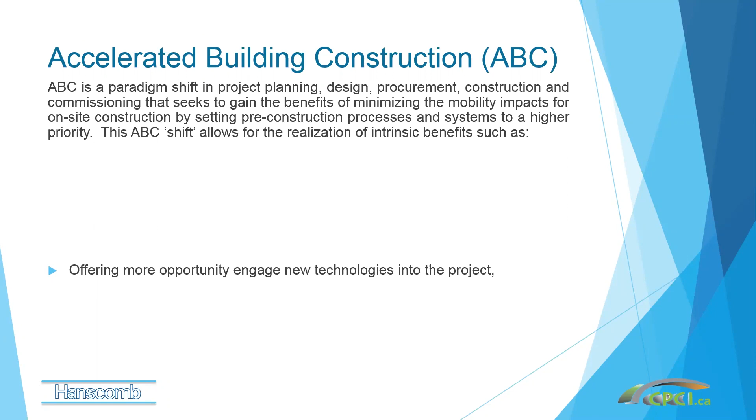Some of the intrinsic benefits include lowering our capital costs, basically shortens overall timelines. Some of these timelines can be shortened very dramatically. We of course improve our site safety and security. There's less disturbance on the site, it's a much cleaner site. We're going to gain a lot in project quality, and we've got many examples of that. We're going to enhance project durability. We're offering more opportunity to engage technologies into the project. The one benefit of these systems, of course, is that we have applications to install in a factory setting, and that makes it much easier to put in new technologies that are really wanted in the new building systems.

We're reducing long-term operational costs. We're limiting our social impact costs. And of course, we're limiting environmental impacts as well. I do notice I'm getting some questions early on, and we will answer them as best we can. I might leave them towards the end of the program today, but if there's something topical as we're coming up with it, I'll do my best to respond to it verbally.

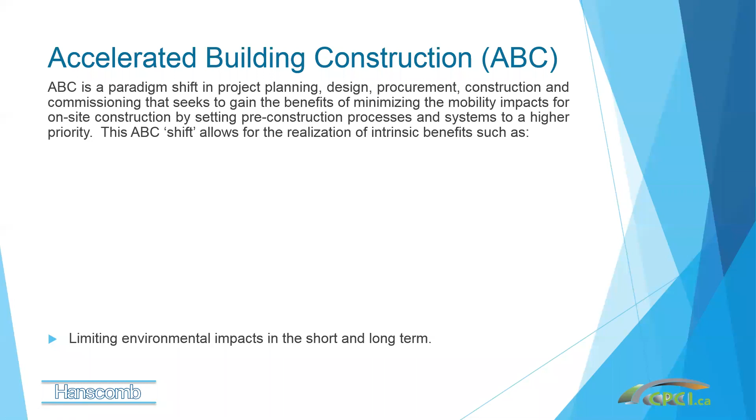Now, to carry on, areas where ABC improves projects is in the area of complete design integration. It's vital that design integration is used on an ABC project. What makes that really impactful is in the area where we see BIM being applied. Anybody who's a BIM proponent is going to really love ABC approaches to construction.

So site constructability is worked out very early on. In fact, much of the project is assembled, not so much constructed on site. That improves a number of factors, including access, the number of people you need on site, and the ease of installation. It's more of an understandable, intuitive process. It's much easier to build these projects, and again, we have lots of examples of that.

Site security is improved during the project, less to watch over, more just-in-time construction. Total project delivery time has dropped dramatically. Again, we've seen some incredible improvements on time, and I've got examples of that. Project zone safety for workers and the public alike is much better.

And project durability usually goes up. In fact, because we're working in modular systems, we are often building for that modular approach, and therefore everything we put in has to be that much more robust, and it shows up in the project.

Weather-related time delays are minimized, especially in today's changing climate conditions. That could be very important. And of course, overall financing and borrowing costs actually come down.

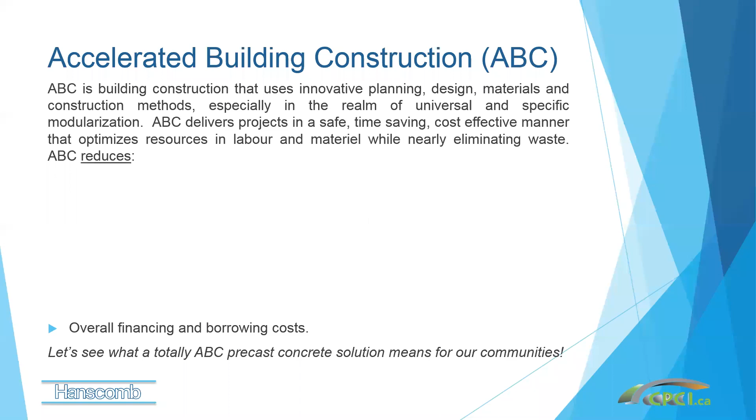Now let's look at a project from the point of view of a user. They didn't realize they had an ABC project. This video will tell you what they thought of the project.

Hi, I'm Licia Mullings, and I'd like to take you through our home. Bright colors provide stimulation in spaces specifically designed for dementia residents. Doors are paired together like duplexes with colored porches to provide a wayfinding experience.

Upstairs are 6 supported living neighborhoods, each with its own dining space and servery. There's ample room for relaxing and spending time with friends and family. Our residents love the abundance of natural light and the warmth of the interior finishes.

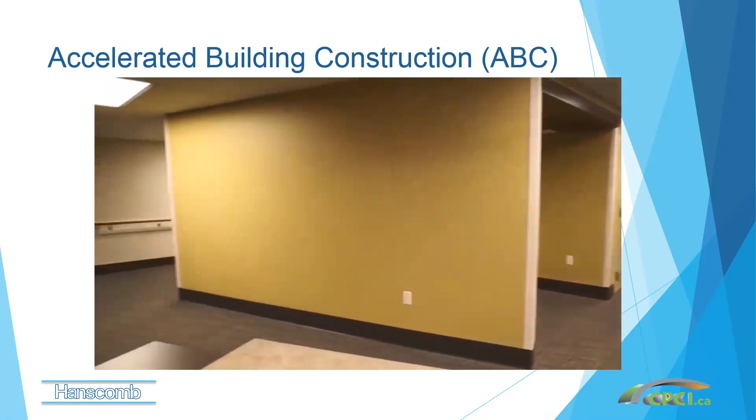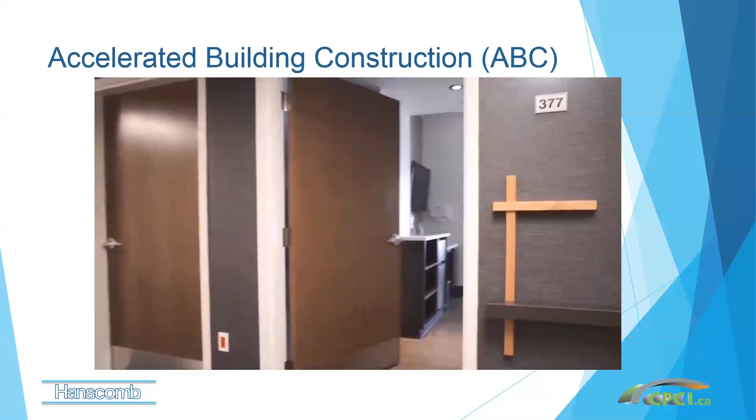Central care stations offer a clear view to all residents' front doors. Each neighborhood has 33 private suites, including some for couples.

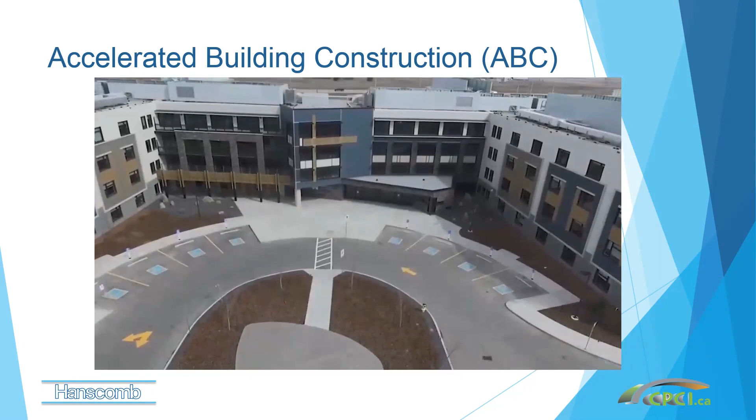Come inside. Each has its own kitchen, television, and barrier-free washroom. Secure gardens provide a safe outdoor experience.

Clients really loved the project. They have no idea that it was a modularized project with all the intrinsic benefits that come with it. They just noticed they got a wonderful project out of it. And certainly the quality is there.

So where did it all come from? Well, originally, this actually started with the U.S. Department of Transportation, their Federal Highway Administration. They're the ones that came up with the approach of modularizing a lot of their major systems, and they use it for things like overpasses and major highway sections.

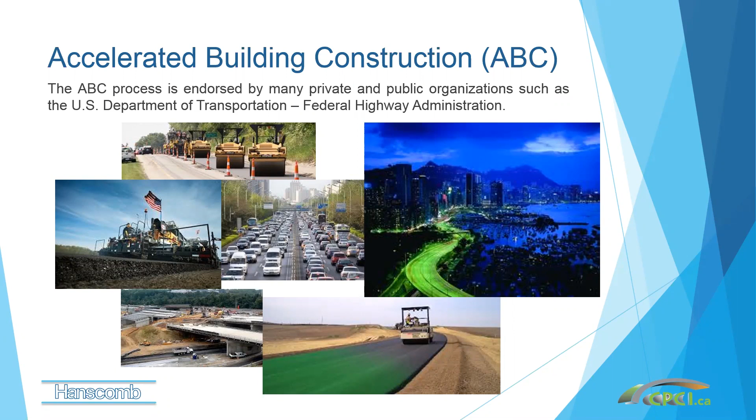The ABC process provides great flexibility across a wide variety of project types. We're mostly going to be talking about residential project types in this demonstration today, but you will see opportunities to look at all sorts of buildings using this system. And of course, it doesn't have to look like a box. Although if you want it to look like a box, it certainly can do that.

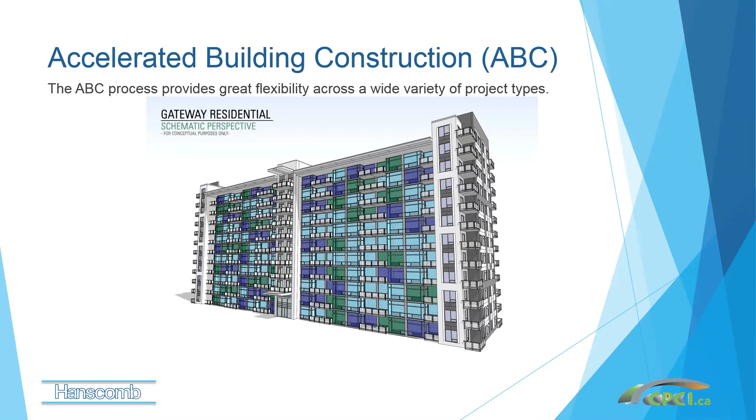This is a model of a project that was put together to be put in northern Alberta. And you can see this going in any major center anywhere in North America and Europe.

The ABC process allows unique solutions not offered by many site-built approaches. In this one, of course, we're looking at doing all sorts of modular units that get inserted into a structural frame.

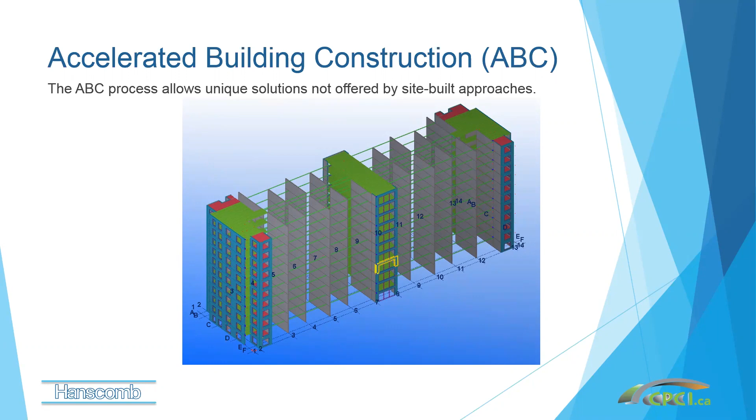So this gets to be logically rethought when you start looking at how you build things. Wouldn't it be nice if everything you did was undercover and the roof was already on? In this application, the approach was to put a roof on before the building was actually finished and then insert the units thereafter. You can see these units are blocked out as modules.

And that gives your client a lot of opportunities. An approach like this would allow you to have a presentation suite, do all your rework, pre-finish work ahead of time before you actually install it in the project.

And the level of quality control on a product like this would be superior because you wouldn't have to accept an inferior project on site. It would all come out with all defects gone and just be inserted into the project.

So the ABC process is only limited to the team's imagination. This is an example where their imagination worked, and when we ran the economics on this project, it looked very favorable. And you'll see examples of that where it's been done in the past.

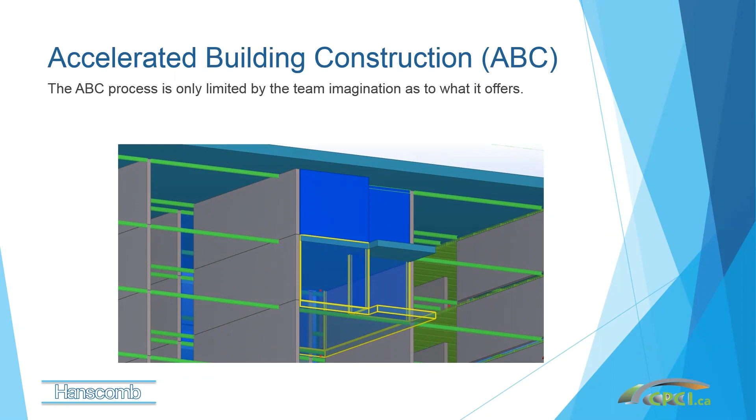The ABC process was critical in the overall development of major community development in Fort McMurray back in 2006, and I was involved in that project. We did 9 prototypical condominium apartment buildings using a panelized system with precast walls, floors, and roof assemblies. This was called the Eagle Ridge development, and its highlights included...

Primarily 6-story tall buildings, 150,000 square feet with 1 level of underground parking. The underground parking effectively ended up being free to the cost of the building because we basically just needed to cap off from the structure that was poured in place below that.

Each fully finished building was completed in just 55 calendar days by a crew of 6. That included a crane operator, the project manager, and 4 basically installers. And it took about 2/3 the cost of standard construction at that time.

In the photos that follow, you'll note how clean that site is. This is something we're quite proud of.

Because of the diversity, the same major residential development used the ABC process to replace a $20 million bridge design, overpass design, with a $6 million solution. So again, the modular approach really came to the fore, especially back in the whole highways and overpass systems.

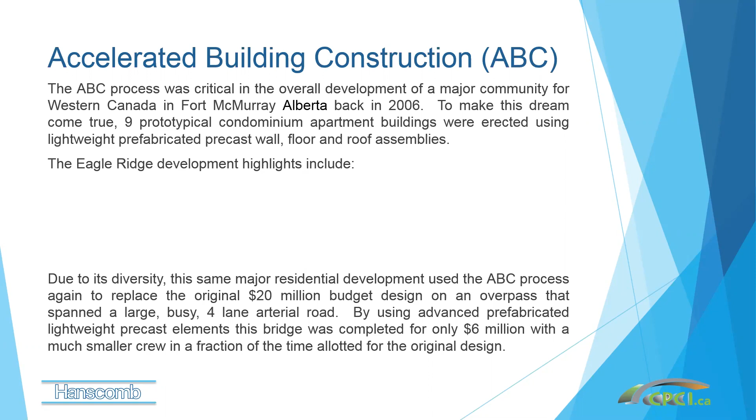Here's a picture of the project as it existed before the fires in Fort McMurray. A bit of an aside on that - they had some major fires in the area. These buildings basically went unscathed, even though there were lots of fires around them. I think they had some damage to the roofs where they had to be repaired, but that was the only place where the fire had actually damaged the buildings whatsoever. So they actually withstood fire very, very well.

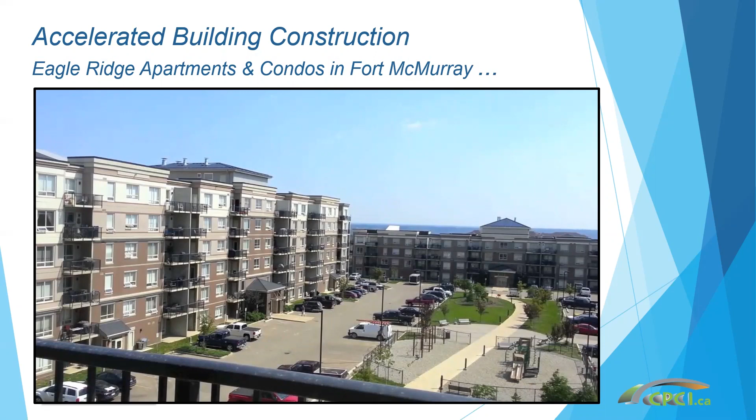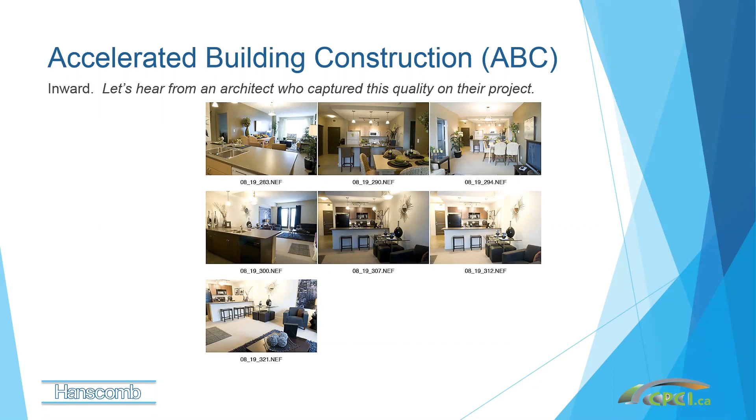I've got another video here to show you. This one is from the architect's point of view of that previous project you just saw.

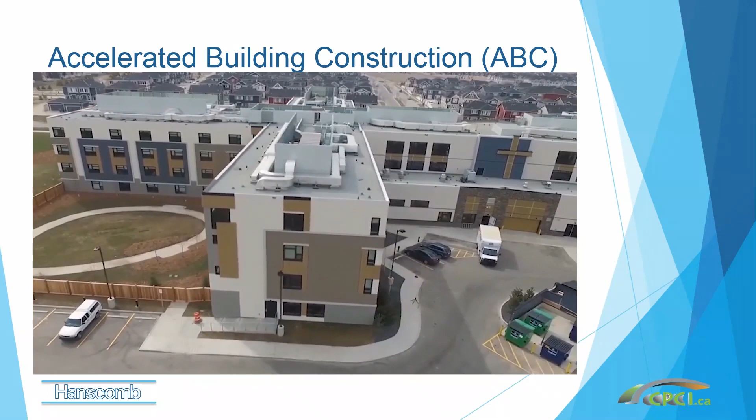I'm Christopher Babbitts from FWBA Architects. The decision to build with precast concrete informed the design, and our approach was to turn limitations into opportunities. Concrete surface treatments and creative use of color, texture, and depth enabled a 4-story design to harmonize with a 2-story neighborhood. A hollow core floor system, together with innovative delta beams, offered us the thinnest floor structure possible. A 4-story design was achievable within the zoned height restriction, which maximized the land value.

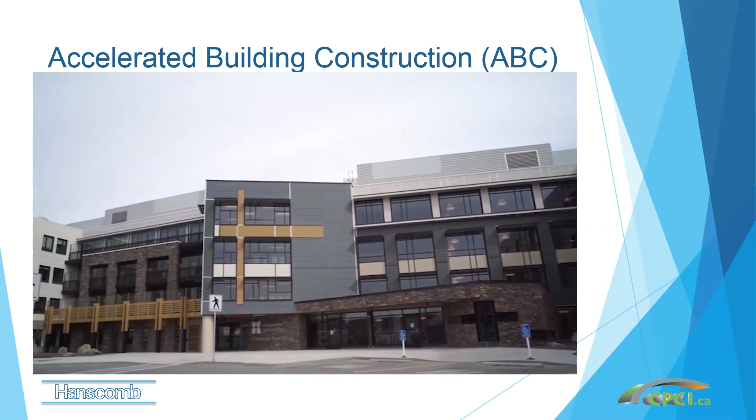As architects, we are always looking for performance, durability, and sustainability. These locally manufactured concrete panels may look like wood, or stone, or stucco, but have a radically longer anticipated life cycle. This is a place for people.

Now, I want to reiterate the whole look thing. Those panels are all embossed. The project I showed you earlier in Fort McMurray was all embossed. The one complaint we had when we originally put the project together is that the brick looked too perfect. We actually had to go around and discolor the brick slightly to give it a bit more natural look, but the fit and finish is superior.

You can basically get with a modular system, especially in precast, any kind of finish you want without actually having to go to the great deal of expense of bringing in original finishes like stone or wood. Yet you end up with something that surpasses their durability, especially in areas like wood. So you end up with a better product for less money and much easier to put together.

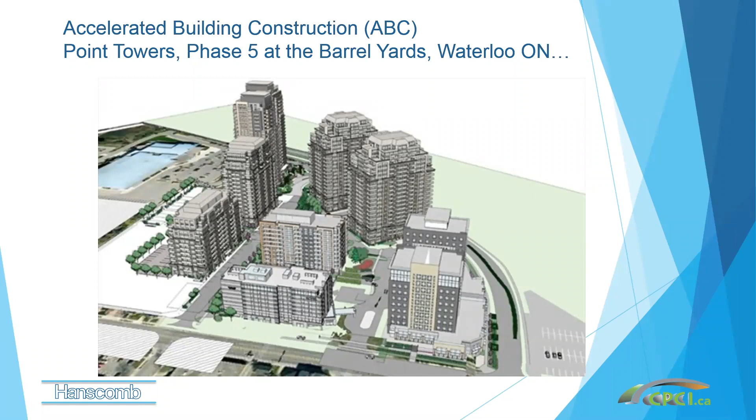Now, here's a project that's very interesting where they used ABC, and it wasn't actually what they did out of the start. It's called the Barrel Yards in Waterloo, and the project was originally started as a cast in place project. The owner was pretty savvy - they realized they weren't going to do very well if they kept going with a standard cast in place project.

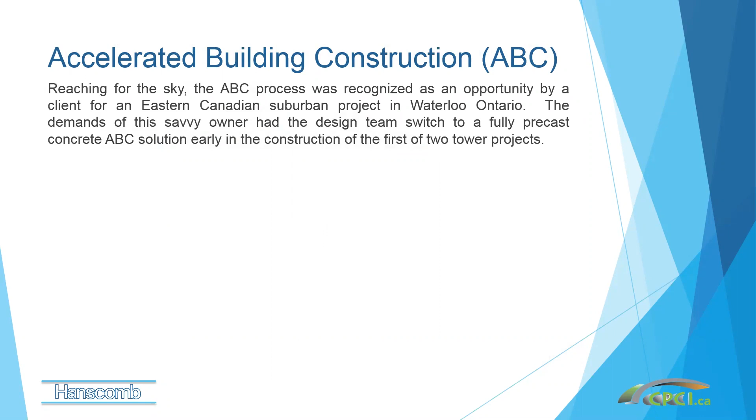So they had 2 towers going at the same time, and they stopped one of them, letting the other one carry on as cast in place concrete. For 6 extra months, they went and redesigned it, switching it over to a modular precast system. Now, these 2 towers are 25 stories. They had 357 living units, and it was a large project, 450,000 square feet plus.

They really wanted to maintain the design intent throughout the system. So when they switched over, it was a very stringent requirement for the designers to rethink this in an ABC system. And when they got to the precast concrete specialists, they had to come up with solutions that match what they were going to get right out of the gate using cast-in-place concrete.

Even with that - and they gave the other building a 6-month head start - they still beat the other building, which was using full modular versus the one already being done in cast-in-place. They beat it by 4 months. That's literally like giving somebody a 6-month head start and ending up in front of them. So they're basically at walking pace, and as soon as you go to ABC building construction, you're at a sprint.

The architects were willing to accommodate any of these minor adjustments. There are some practical requirements that have to be taken into account, but it didn't really affect the building, and it ended up with a superior building, both saving time and money, especially in project financing costs. And trust me, your clients want to know about that.

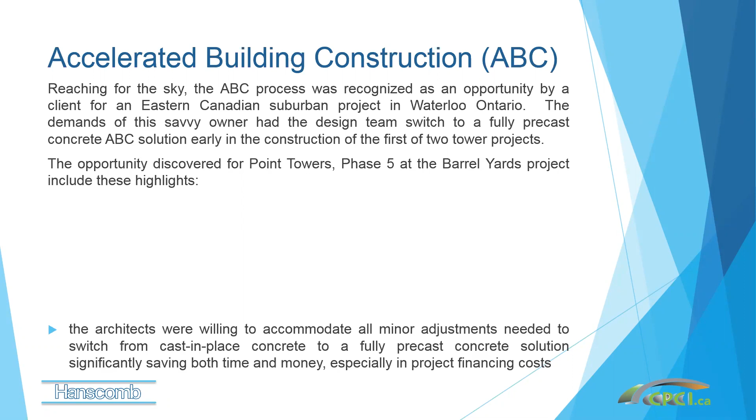Some more photos of that project. And one of the things that's not shown easily in all these photos is once you get into the modular system, you end up with a very clean site.

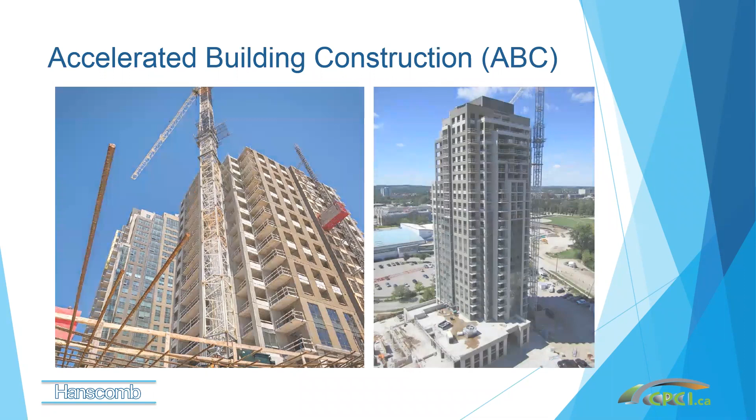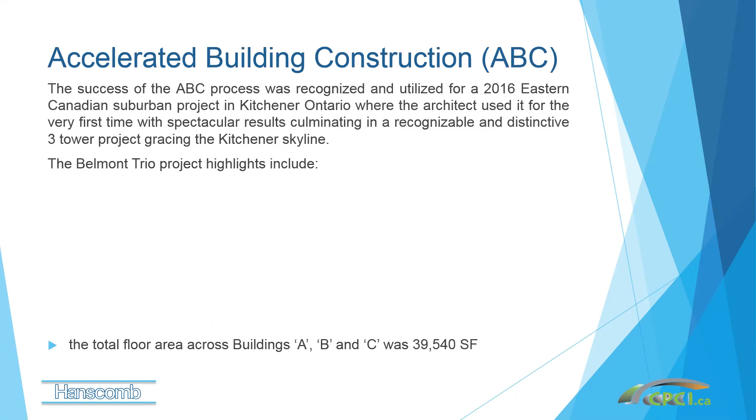We see a lot of this using the geometry that was available to them and looking at the elevations that were going to be so predominant in that area. This became one of Kitchener's, I think, really go-to look-at projects. There's some other examples really looking at that balcony, and again, that was all modular and was installed in place.

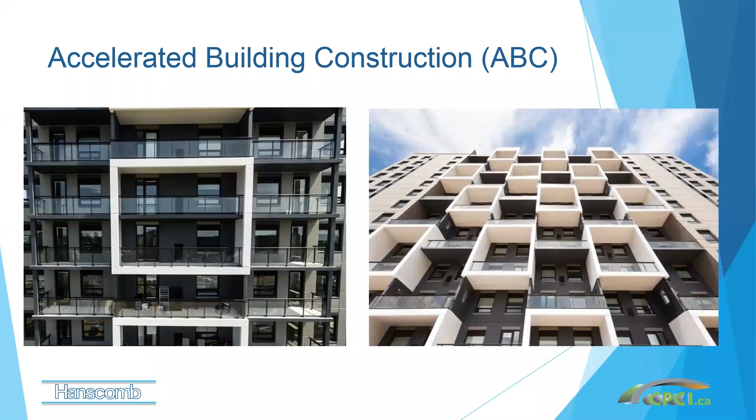Now, quite often we're dealing with areas where there is an existing style, an existing kind of community finish we want, especially in areas that are heritage-looking, and there isn't a lot of room - these are urban areas.

I'm getting asked if there will be photographs of the actual erection. Absolutely, we're coming to it. I'm just showing you some of the beautiful pictures. And of course, there will be a document available later. Those are some of the questions I'm starting to see.

The other question I'm getting, and we'll get back into this, is what's the cost per square foot? It depends on the project, so I can't really answer that specifically. It depends on what type of project you're dealing with.

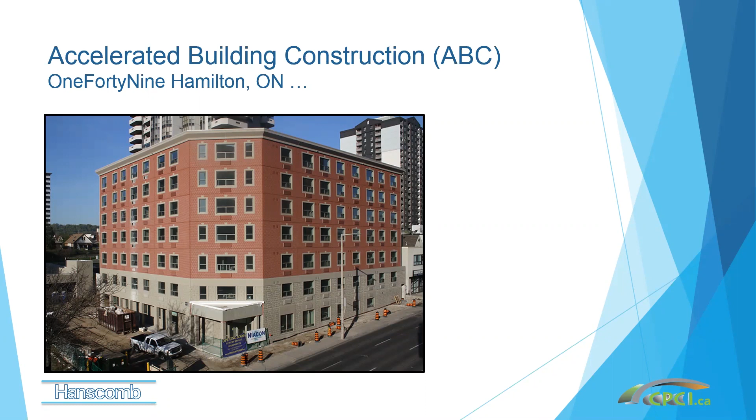So anyhow, with regards to this one in Hamilton, they had an existing heritage area. They had to put a new building in a very tight urban setting that had to reflect the neighborhood. The benefit here, of course, is you can get that style, you can get that finish, and because you're working with an accelerated building construction method, you don't need a lot of space or take a lot of time for putting something like this up.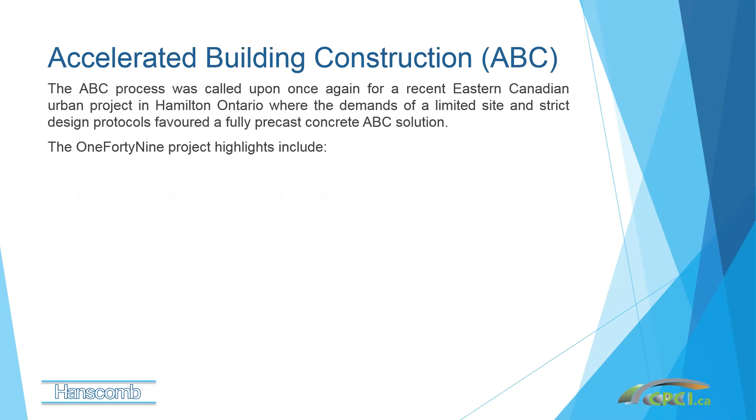So this one here, the 149 project, includes highlights such as it's 7 stories tall. It had 73 one- and two-bedroom units, so it was a rental situation, so cost was very much an issue. The site was very, very tight, so the ABC approach afforded them access where they typically couldn't get it.

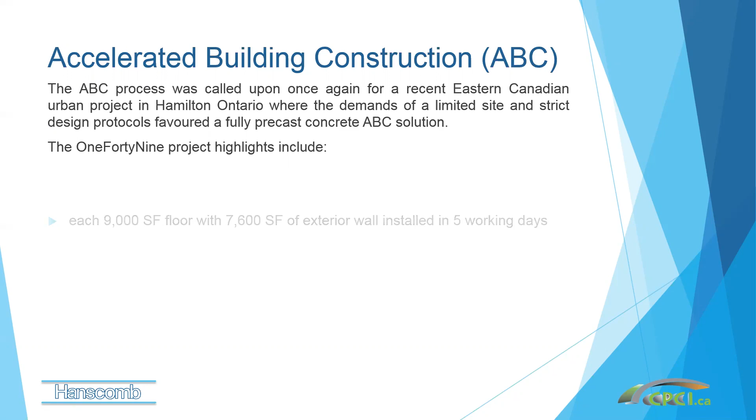Each of the 9,000 square foot floors had 7,600 square feet of exterior wall, and that was all installed in 5 working days. So you're able to put these floors in 5 working days, and each pre-finished exterior panel was created with an almost ready look.

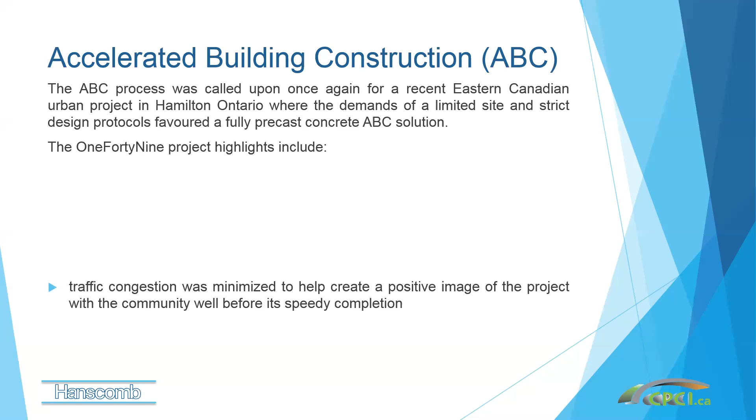Basically, the only thing they didn't put in, and of course nowadays we do, is the windows, but you fly them up now all pre-finished. Traffic congestion was minimized because of the just-in-time delivery, and that created a very positive image for the project in the community. They didn't see it as a bother too much. It was actually kind of fun to see because this building looks like it grows in front of your eyes.

City of Hamilton required the building to match the existing surroundings and have a real brick and stone look. This was very vital in doing this kind of project. The workmanship really matched the area. In fact, it did a better job of it, and it created a really traditional historic look for a new building.

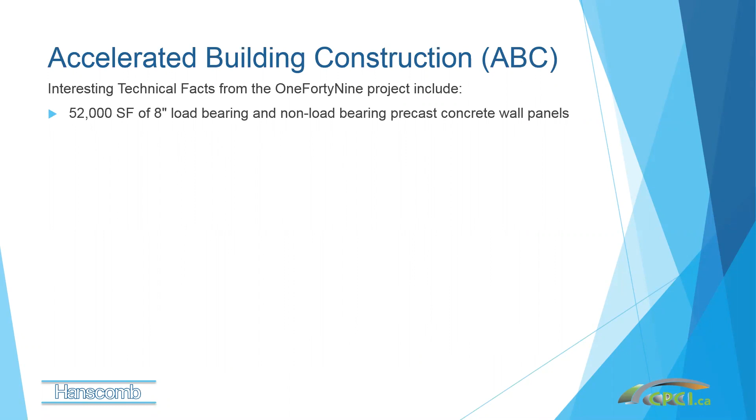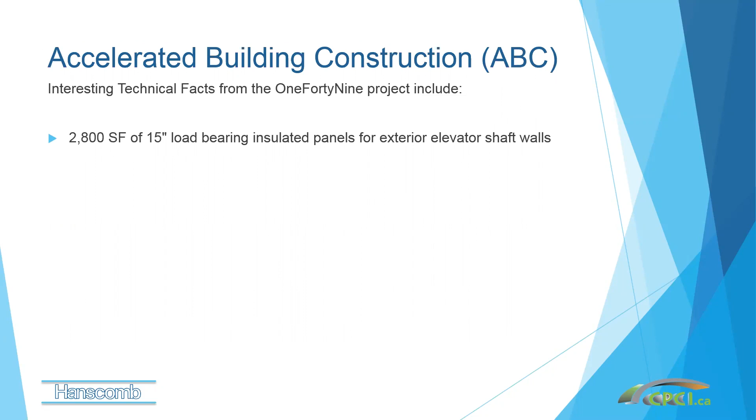Some interesting facts from this project: it had 52,000 square feet of 8-inch load-bearing and non-load-bearing precast concrete wall panels, and 2,800 square feet of 15-inch load-bearing insulated panels for the exterior elevator shaft walls. That gives you a feeling of how diverse these products can be. It also had 6,400 square feet of 10-inch precast hollow core floors and 1,000 square feet of precast concrete landings.

All these parts fit together with 25 flights of precast concrete stairs and 115 linear feet of structural precast concrete columns. Basically it's a large Lego project, with decorative cornices cast in place and designed to lock together. It's important to remember that all these exposed precast concrete elements, insulated walls, landings, and stairs are designed to be pre-finished, with quality control and fit done in the factory.

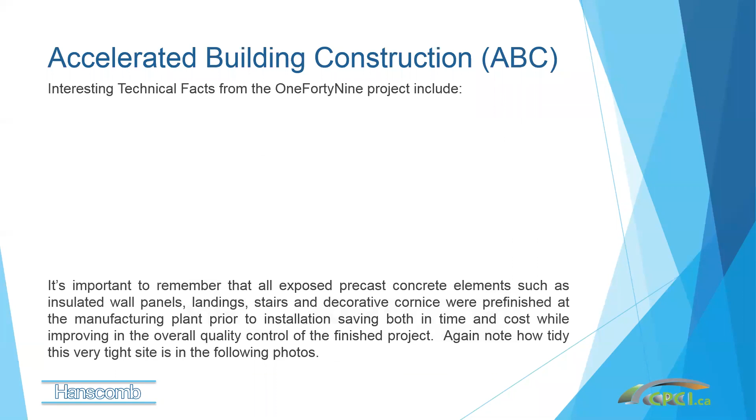So when it gets to the site, it's literally just an installation process. It's very straightforward, a very tidy project, and the longevity and serviceability of that project during the entire life cycle is enhanced. And you see some work as it was going in.

So we're going to now listen to what a contractor thinks about how it is, and this is a contractor that hadn't worked with precast before, about what they thought the precast system was like.

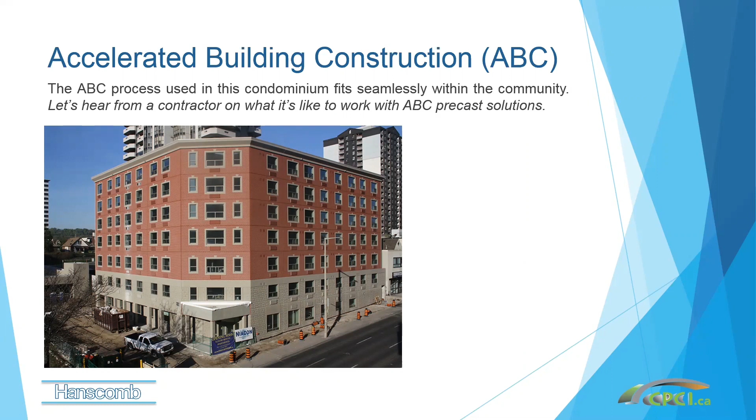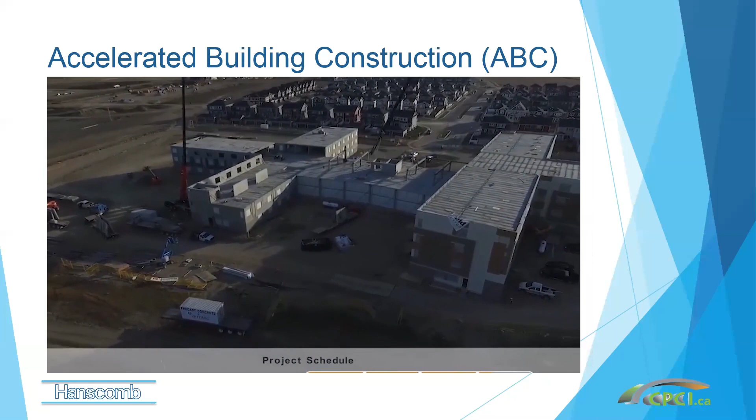Hi, I'm Kevin Juby from Manshield Construction. We built this. The way this project was designed allowed us to construct faster than conventional methods. Our mechanical and electrical trades, which are key to the process, were on the first floor snapping lines and starting rough-ins while the precast on the 3rd floor was being built. This system provided us an enclosed structure and a controlled environment, which afforded our teams maximum productivity through the winter months. I believe we have helped Covenant Health set a new standard for care facilities moving forward.

Now, I played the role as construction manager on that Fort McMurray project. Honestly, once we showed everybody how things were supposed to fit and how things were supposed to go, I spent most of my time sitting in the truck. I didn't have to do a whole lot. It's pretty intuitive. It's much easier to get a quality project, and people understand what they're doing.

And you're not dealing with as many people. You're dealing with high quality people that know what they're doing. So from a contractor's point of view, it's actually a lot easier to build with this system. Now, you don't always get the chance to build boxes. You have to build something a little bit more interesting. This project in Calgary really represents what can be done, and it's just one small example of what can be done.

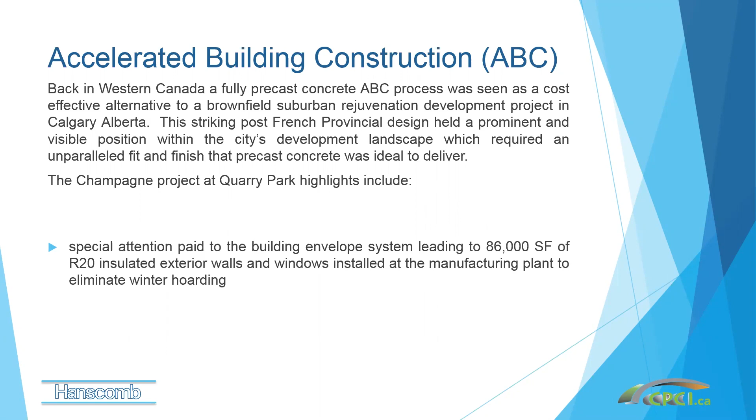Special attention was paid to the building envelope in this case, leading to 86,000 square feet of R20 insulated exterior walls, with the appropriate windows already installed in the manufacturing plant. That basically eliminated any need for winter hoarding. If you are in Alberta right now, winter hoarding is probably important to you. Actually, most places in Canada, even BC right now, are suffering from some of that.

They had large windows and balconies incorporated wherever possible, so you're not restricted to any of that with the precast systems or any other modular system. They're often coordinated, and it had 2 levels of interconnected underground parking for the building.

Precast concrete was chosen for its inherent resilience and fire resistance, vital for a project like this. Here's some photos of the project under construction. You'll see in this next photo, a panel flying in. Notice the windows and everything are already installed, so fit and finish, quality's already been proven at the factory. All you have to do is assemble the panel.

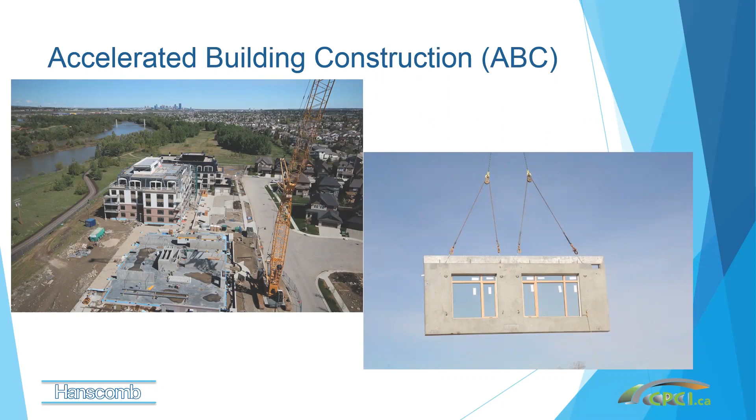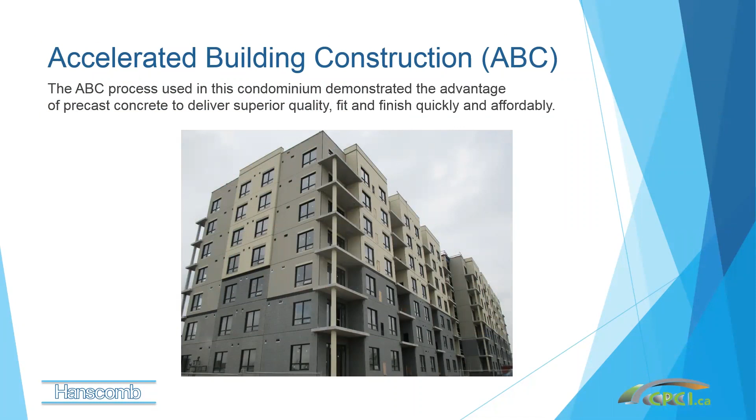Now here's another project where quality was really important. It looks very similar to the one in Fort McMurray, but it's not the same one. You'll notice affordability was a big issue with this one. Back in Ontario, in Cambridge, they decided to go with a fully precast ABC solution for the Saginaw Gardens apartment project. Highlights include 7 stories tall with 122 exceptionally appointed inside suites. The structure had to be affordable, since they were going to put the money into interior finishes, and the building had to show quality throughout. They chose precast modular to deliver all of that cost effectively and still drive a very high premium out of the market for these types of projects.

One of the interesting things here is the soundproofing and fit and finish, but the soundproofing is vital. For the project in Fort McMurray, one of the buildings is literally up against a 4-lane highway and next door to a fire station with fire engines. We could watch the traffic going by at peak rush hour and watch the fire engines leave with lights flashing, and the only way you could actually hear them is if you opened the windows. You couldn't hear the sound through the walls. So the quality is there.

This total precast solution was selected because above and beyond everything else, its ability to deliver speed of construction, efficiency, improved safety, but really the big thing for them was quality and aesthetics and unparalleled ease of maintenance. This was going to be a big feature they sold to the clients who were going to buy their units.

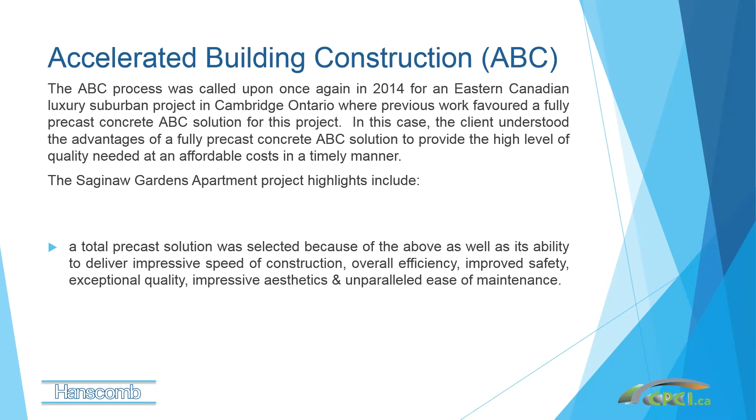This multi-unit apartment included over 1,200 advanced precast elements. Some real thought was put into this, and it had 10-inch hollow core floors. It gave them 154,000 square feet. The project also included 1 level of underground parking, which is pretty standard.

So basically, that's what those panels look like. Nowadays, of course, they're usually flown in with the windows and doors already in, but this is how this project was going together, and it did produce a superior project in Ontario. You can see how the superior fit and finish - you can literally count on one hand the number of people on site - and yet the efficiency of building is superior.

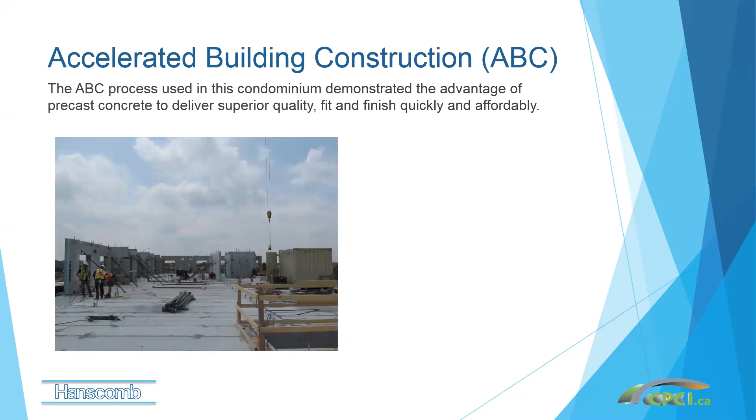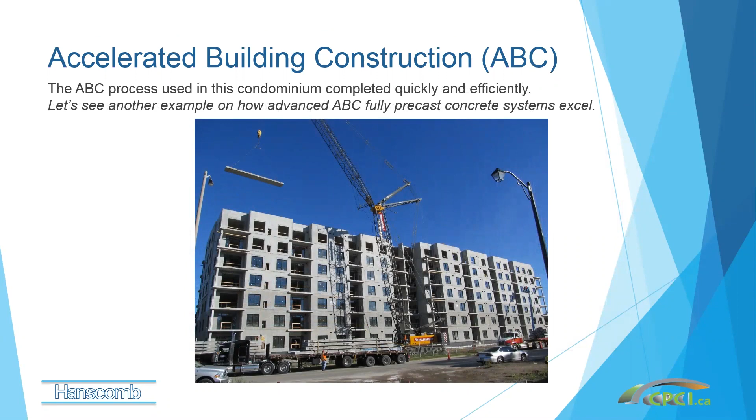So we're going to look at a little bit more here. This is a video from the manufacturer of that project that we've been seeing videos on before, and this kind of really gives you a graphic feel of how this project could move so quickly.

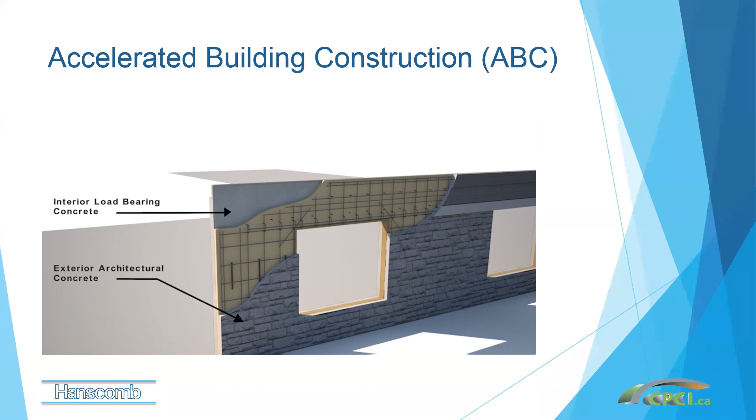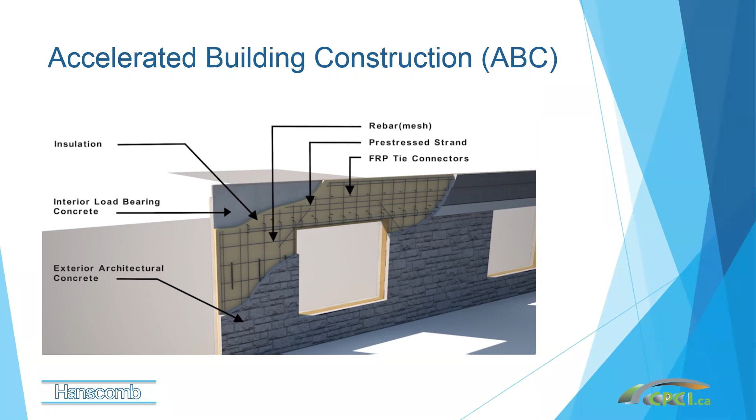Armtec Precast found a need in the continuing care market for a fast and sustainable construction method. Our solution begins with an insulated sandwich wall panel, which includes an exterior concrete skin with variable finishes, a continuous layer of insulation, and the load-bearing structure. Having the structural mass of concrete inside the insulation enhances the thermal storage properties of the wall. The pieces are built off-site in a controlled environment with tight quality control. The beauty of the design is the repetitiveness of the construction. After it's coordinated through a BIM model, it's like putting together a Lego set.

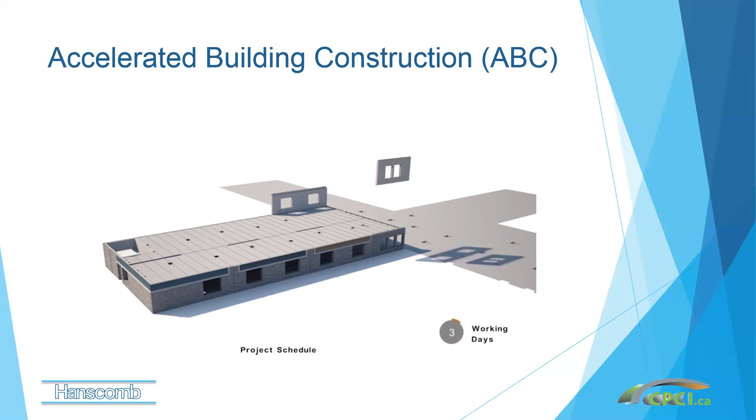We were able to build the shell of the building in no time at all, allowing the contractors to do their work inside. And while one wing was being built, another crane was already starting on the second wing. The precast construction continued from the main floor to the roof and included all pre-stressed hollow core slabs, columns, delta beams, stairs, elevator shafts, and the wall panels. We were able to construct the building in 4 months, compared to a conventional construction time of 16 months.

Now, I wonder if any of you are listening to the term delta beam and wondering what's the delta beam? Well, we've seen a lot of these systems move along to incorporate hybrid systems. An example of this is these Luxembourg condos in Quebec City.

They basically wanted to go to an ultra-modern, very clean, very slim line. And these designs, again, high-end product. So they wanted a really slim floor structure with long spans. They wanted to have all the benefits of the modular construction. They wanted this really clean, high-level fit and finish. This is where you go into these hybrid systems where we're starting to use precast with other material methods, and they can be very, very advantageous.

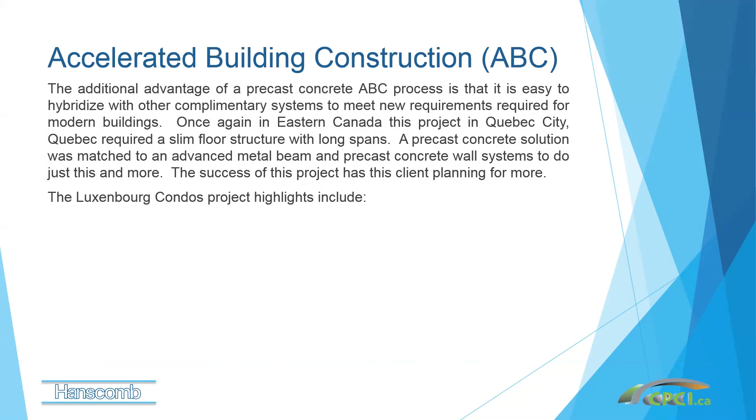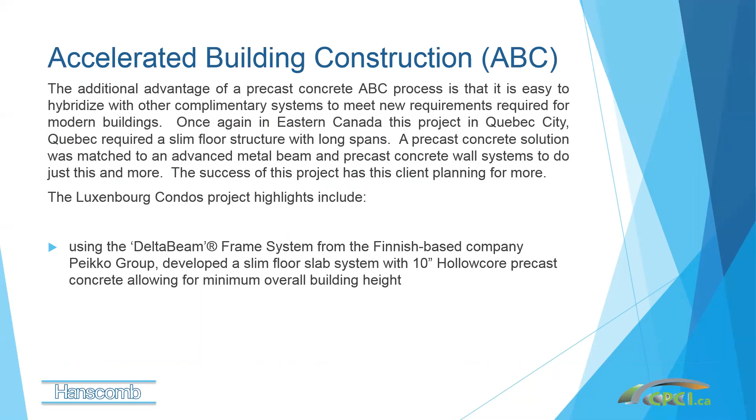So this building here was 6 stories tall at 90,000 square feet with ultra-modern floor space, lots of open area. We're going to show you photos of that. It uses the Delta Beam system, which is a Finnish-based company from the Peikko Group. They basically come in with this pre-engineered steel beam system that's designed to carry precast and bring precast to another level as far as the kind of look and fit and finish you can do.

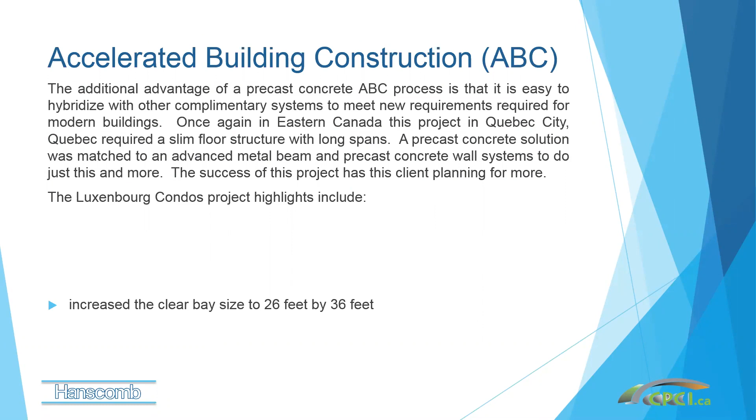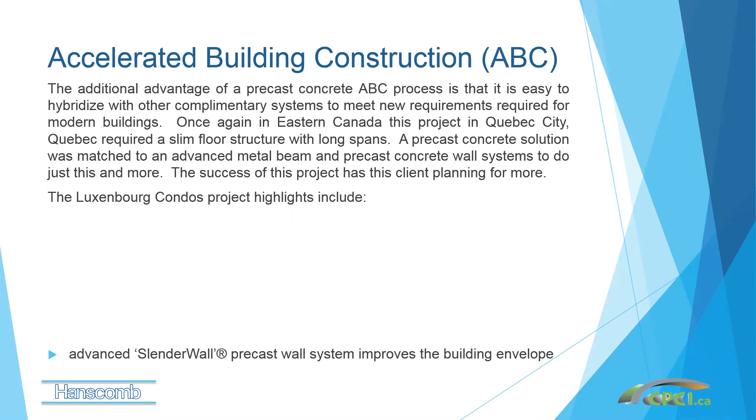It's a really great hybrid system. It increased the clear bay size to 26 feet by 36 feet, which gives you a lot of room for open floor plans and putting walls where you'd like. These larger bays also allowed for more parking stalls in the underground parking. That's a big advantage. Now, you're working with something that maybe is a slight premium, but the benefits of that are just huge. And of course, they used an advanced SlenderWall precast wall system, which really improved the building envelope.

I take my hats off to the industry here, the precast industry. They really do a great job in meeting or exceeding the requirements for building envelope and energy efficiency. This hybrid ABC system basically was able to do 12,000 square feet every 3 to 4 days, produced a fire rating system up to 4 hours, 2 hours for the columns. What was the cost? Well, only $22.37 per square foot for all the Delta Beam components, the precast concrete elements, and the concrete topping and erection. That's a pretty good price if you think about it for a really superior floor system. It's really a great price, and I was quite impressed with this.

An example of how a typical floor progressed for this project: day one, you're installing all the composite columns, Delta Beam, and precast concrete shafts to the entire floor. So all your vertical elements for that floor go in. Day 2, installation of 6,000 square feet of 10-inch precast. And that just literally goes in, locks together, and gets grouted. Day 3, another 6,000 square feet. Day 4, you do your topping and any miscellaneous works. This could move that project along at very high speed.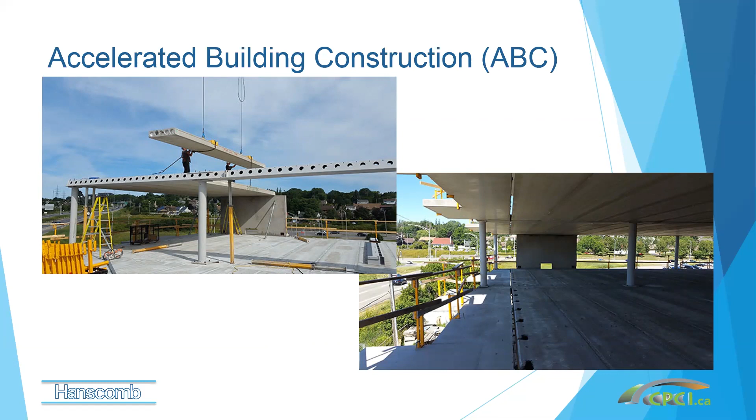Now, of course, we've been doing this for a little while. A good example of this ABC approach goes way back into the 60s, in San Antonio. It was, I believe, a Hilton. And this has a great deal of history. It's actually part of the historical tour you take of San Antonio. In 1968, right down on the waterfront, only one block away from the convention center, they did a 21-story high-end hotel, fully modular. This is all precast, actually. You can see pictures of the modular units going in there. And it's still there. It's one of the things that everybody goes and sees.

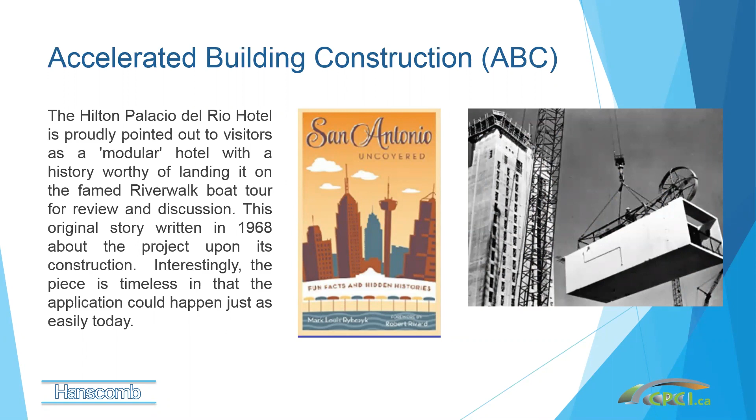While it was being constructed, they were putting 17 units in a day. Basically, everything was put up and installed in 46 days, and most of the workforce was a relatively small workforce, operating safely in a clean climate-controlled manufacturing plant. The installation force was very small as well.

One of the things that's interesting here is as these systems get developed, they actually create industries within communities to service areas that really are looking for this more modern, more sustainable way to build. And that is really a bit of a spin-off for these sorts of things. So Texas has really benefited from the foresight that this project brought to it.

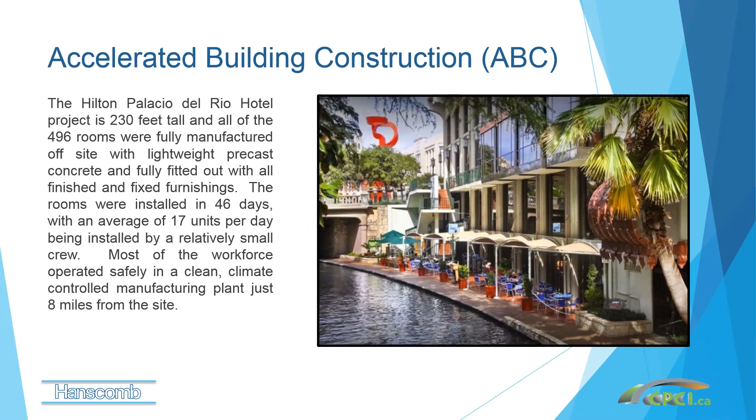So the ABC process relies heavily on incorporating modular and prefabricated elements, and that's what it means. This is why precast seems to work very, very well, because it's a modular prefabricated element. This approach can be used for the design and construction of basically anything, and the pre-planning is really key to its success on that project.

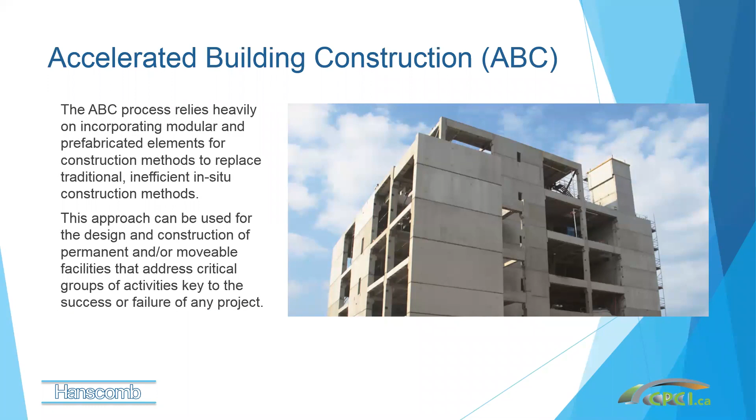The ABC process embraces modular and prefabricated elements, as I mentioned before, and it really changes the way we think. To really get the full effect of how ABC works, we want to look at a number of factors that make that work. So is it time for a shift? Absolutely. We've got to make this work.

So you have to start with a project charter. Everybody has to be on board with the process from the beginning. It is rare that you can start a project with a different system and switch midstream. It does work, but it's rare. It takes somebody who's really got courage to switch midstream. If you start this way, your success rate goes way up.

It includes getting everybody in the project team on board, developing a specific business case that really supports ABC. There's a process of sub-tendering, and of course you do something called job order contracting with regards to moving a project forward. I'll explain what those items are.

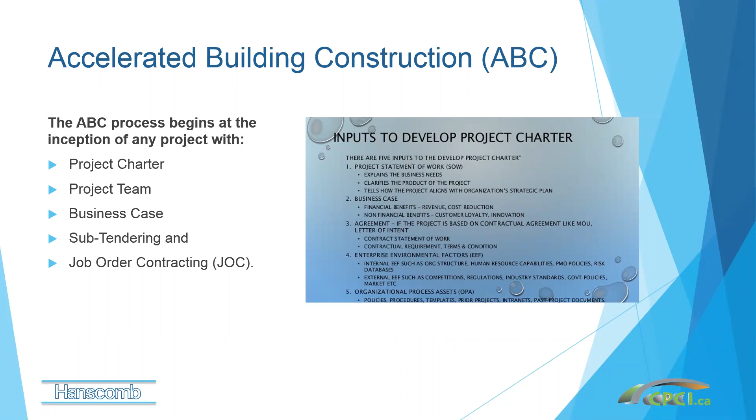Why we do this? Well, you can see all your planning happens up front. This is where all the benefits come from. So you do this integrated design process we've been talking about so much. I've been in many integrated design process projects. The most successful ones are highly modular.

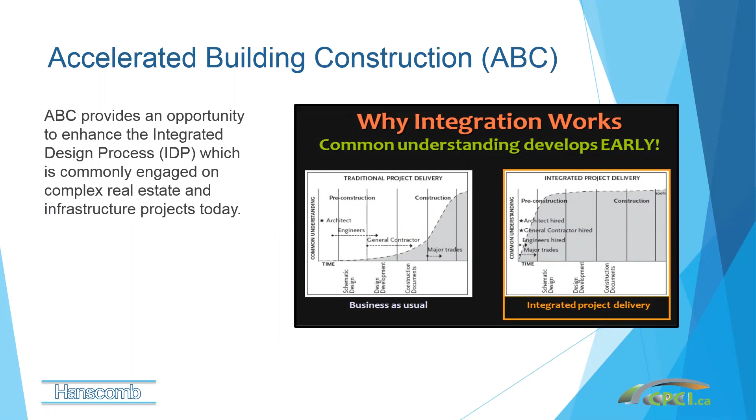Both sub-tendering and job order contracting incorporate the ABC processes, and it reduces unnecessary levels of engineering and design, because you basically put the engineering and design fundamentally with the subject matter experts, and then your engineering team are there to make sure that everything meshes with the intent of the project. So basically the quality of engineering really improves. The opportunity for not having any gaps or unnecessary overlaps has also been reduced.

So here's a project that really champions the just-in-time approach for using the ABC approach. This is a project in Fort McMurray that I was on, and you notice there's nothing in the way of a laydown. Those trucks just arrived. You can see panels being lifted off and moved on. You notice in some situations we still have plywood on the windows. We stopped doing that. The windows weren't getting broken on the highway, so there was no reason to do anything like that. This was the first project, so we didn't have the panels pre-finished in the factory. All the subsequent projects that we did on that site did have pre-finished panels, but the embossed finish was already in there.

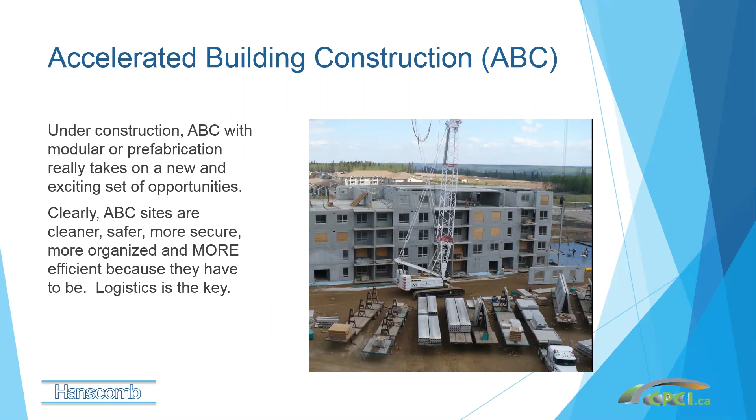So you can actually set these up to do all sorts of technologies that are now being put in. There are technologies coming out that can even harvest waste energy from things like appliances or mechanical equipment, which can be installed, pre-installed in the factory and put into these modular pieces rather than trying to do something after the fact on the project. So there's some real benefits, both structure, fit and finish. They can certainly meet all the seismic requirements, and of course, they're fireproof.

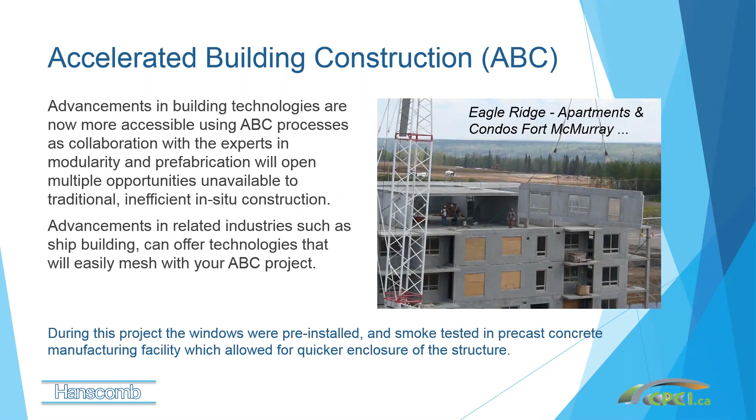So here's an example of some of the inspection work that goes on. Inspection and payment for ABC processes basically happen up front. You actually have to have a lot of this process developed early on. There is a process that the funding institutions are comfortable with regards to securing the rights to the product before it goes on site, so you don't have to worry about paying for something that's not on site. It actually is considered on site. There are unique product codes that go against this, so it can be something that you have to deal with your financing institution with regards to how things are paid for. But the monies put in for payment and deposits are secured, and the owner still gets their product at the end of the day.

So taking possession of an ABC modular project is not any different in the long-term thinking than doing a standard in situ project, but you don't have the problems with fit, finish, delay, all sorts of things. You get a better product for less money.

Issues are dealt with on the ABC project before it's delivered to site. So you end up with a deficiency list that's extraordinarily short on an ABC project, rather than some that I've recently dealt with 400 deficiencies on, and it took 6 months to get all cleared up. It was a nice project, but it still had lots of deficiencies. That was built on site. If we would have been able to do an ABC process, I don't think I would have had as much work dealing with that.

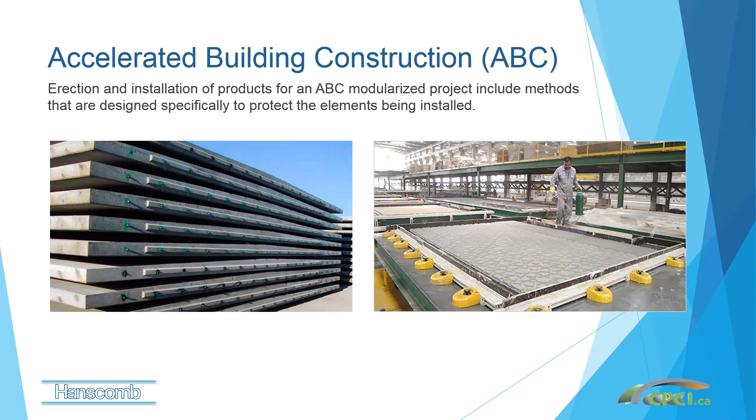Of course, commissioning is easier, and turnover to the building is faster and easier. Remember, most of your systems are pre-tested and pre-fixed. Even the mechanical and electrical systems that are put into the modular units brought out to the site can be pre-tested before they get on site, so it's just a matter of a final test.

Your operational readiness for the project, especially if you're a building operator doing an office building, you want to make sure that day one you open the doors, everything works, and you can operate like you've been there for 20 years. This is very possible with an accelerated building construction project. It's fully or highly modularized, so you get a lot of stuff pre-commissioned and it's ready to work day one.

That saves you a lot of time, a lot of money, a lot of headaches, makes everybody happier with it. Of course, CPCI has a life cycle assessment of precast concrete buildings. It really shows clearly that these buildings last longer. They have a better kind of value later on in life, and actually we'll show you a little bit later on, many of these pieces can be repurposed for other projects in the future.

Taking away the concern or the thought that this is not a sustainable way to build. As soon as we modularize anything, and if it's durable enough, you have something that's extraordinarily sustainable. And that is really the secret of being sustainable. Let me speak to that a bit more.

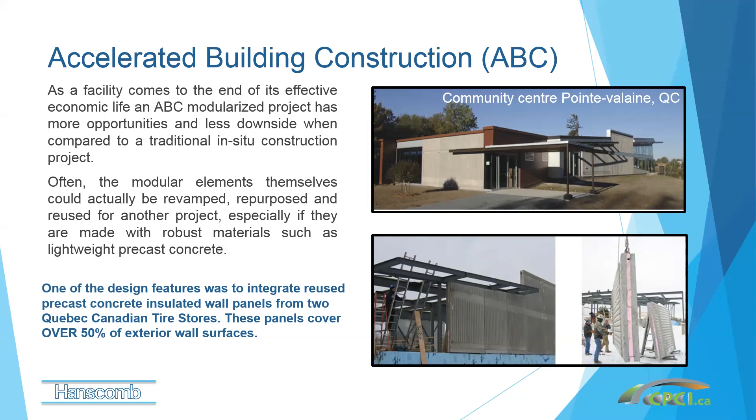So in conclusion, a precast ABC modularized project has very little downside, a lot more opportunities. In fact, you have to really go out of your way to find a downside to any modular project if it's properly set up. Precast concrete is an exceptional product in this system, and therefore, when properly engaged, you get allow great artistic expressions, a very economic way of doing something, very sustainable.

We look at the economics of this all the time. Certainly time saving, and you end up with a better building, better quality, shorter period of time, something that withstands all the forces you're having to deal with, better in the climate that we're dealing with today. All sorts of reasons we should be going this route.

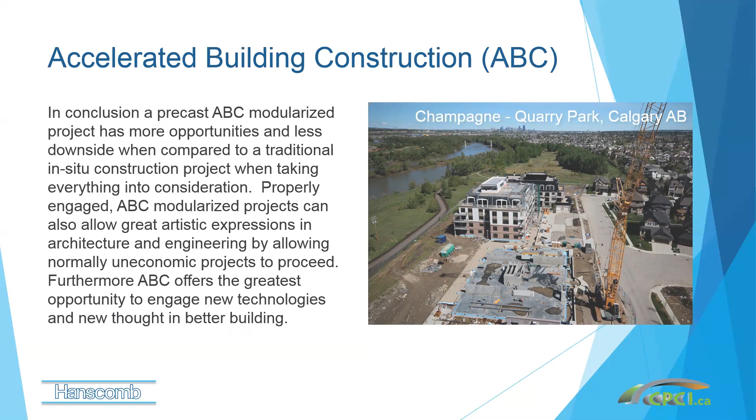The reduction in labor is magnificent, I'm reading, but decreasing the number of manpower to 6 instead of 50 or 80, will it affect the community stability, sustainability? Actually, it improves it in some respects, because you're turning over poor jobs for good jobs. Quite often you're expanding the manufacturing base, and many of the trades that would work on site actually show up at the factory and do the work there.

What's the highest energy performance completed to date? Any passive house projects? I don't know about passive house. Certainly that's on the horizon. I can get information on that. I know that modular projects—I'm working on a project right now in Fort St. John, which is passive house. It's using highly modularized products, not the precast realm, but going ABC does not stop you from having these high performance projects. I know that the precast industry has product that will meet that.

Are HVAC and electrical systems installed separately? They can be, or they can be part of it. The one thing I didn't show you on the Fort McMurray job was there was a modular penthouse that was lifted up on the roof, and the mechanical and electrical systems were already in it. It wasn't part of the precast package, but it was something we did as part of the modular format for those projects. So that could easily be done.

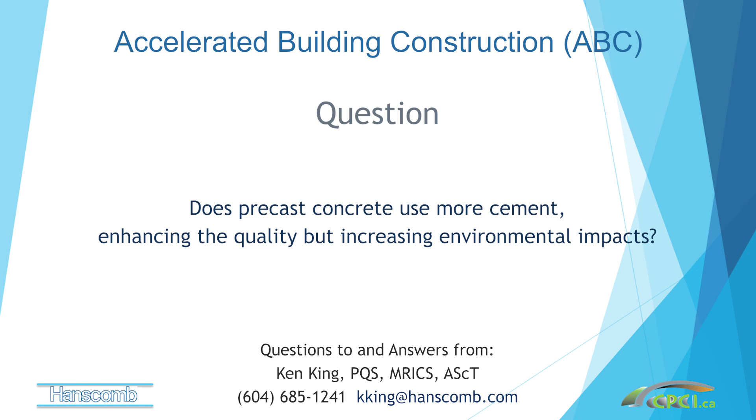No, we've not had any issues with regards to smoke migration measures. Again, the buildings are all designed to meet all the requirements with regards to air seals and smoke situations. This isn't your old precast—this is all modern stuff. Again, we're talking about accelerated building construction. We're not talking about building a parking garage.

When you're doing ABC from a project schedule management standpoint, how much of the entire project as a ballpark percentage are you seeing as construction execution versus initiation and planning? The whole schedule moves to initiation and planning. We had a graph of that—the initiation and planning stage starts very early, and in some cases it can add about 20 or 30% to the time of design just by going through initiation and planning. But you end up saving 50% of the construction time. So in effect, you take about two-thirds the time to build a project, typically half to two-thirds the time, by using this system.

Yeah, the CPCI does have that life cycle cost analysis. Just ask them if you want that. I'm just reading questions as they come down here, happy to ask them. We're going to have opportunities in different locations to do this live, and of course I would be able to speak to you directly on that.